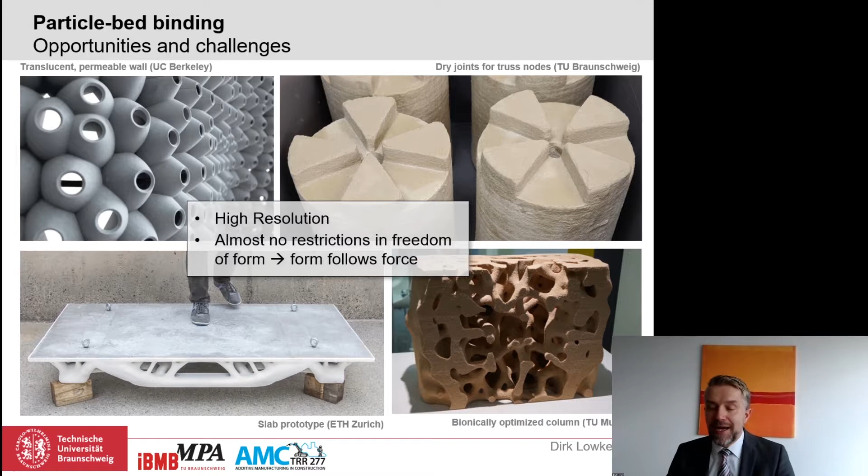However, there is a major drawback with particle bed binding techniques, and this is the limitation in component size, which is limited by the build space. Another disadvantage is the need to recycle the unbound material of the particle bed.

Okay, let's move on now to the mechanical performance. For selective cement activation, the strength values without after-printing treatment do not exceed 17 megapascals. If an after-printing treatment is applied, shown here in the blue columns, strength values can reach up to 34 megapascals. The level of strength is within the expected range, as these concretes have a density of approximately 1.6 grams per cubic centimeter, and can therefore be classified as lightweight concretes.

In contrast, the selective paste intrusion, here on the right side, achieves normal densities of about 2.3 grams per cubic centimeter and correspondingly significantly higher strengths of up to 78 megapascals so far.

Finally, I want to address the isotropy of these materials. In this graph, the strength is shown perpendicular and parallel to the layer structure. As you can see, current experience shows that no directional dependence of the material properties can be observed for the particle bed binding process.

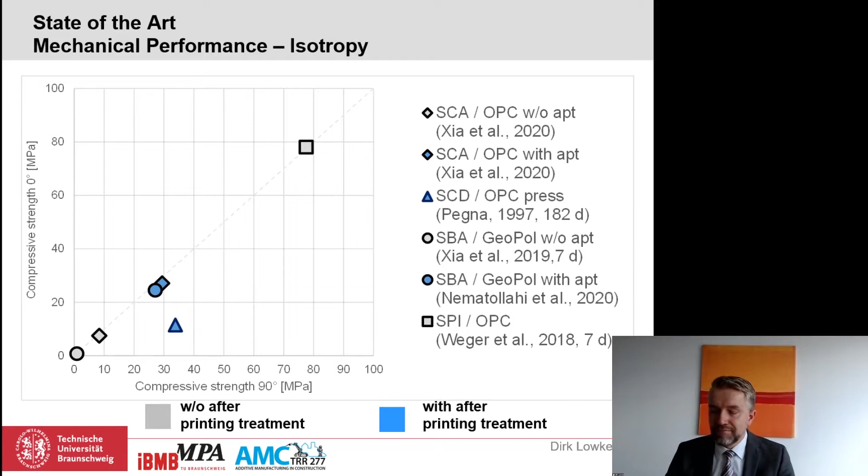Thank you for this nice overview of the state of the art and the potentials of particle 3D printing techniques. In your title, you seem to suggest that this technology, in your view, is capable of working in the construction field as well.

So that would suggest you need to upscale to another level, and there must be a certain level of trust in the material properties achieved with this technology. Could you elaborate on your ideas for scaling up this technology to the field of construction works? Yeah, I will do. Firstly, I would like to follow up on Robert Flatt's statement yesterday. In order to establish additive manufacturing processes as a serious technology in the construction sector, we now must develop a deep and fundamental understanding of these processes.

This means future work in research and industrial development will be characterized by creating the basis for the reliability and repeatability of these processes. I believe simply demonstrating the basic feasibility of a process will no longer be sufficient. To improve the mechanical performance and the repeatability of these properties, we need to understand and optimize every single sub-process of particle bed binding processes. Here we first focus on particle packing.

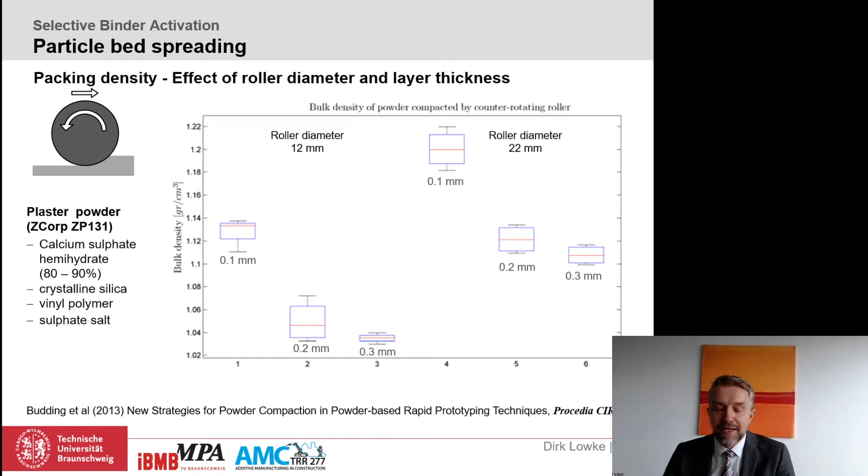As you can see in this diagram, the density increases with decreasing layer thickness and increasing roller diameter. I believe increasing the packing density of the particle bed is key to increasing the density and strength of our components. Therefore, future research should particularly focus on a specific compaction process for the particle bed.

Let me now continue to the process of liquid application. Here you can see the different patterns of liquid discharge from a nozzle depending on the applied pressure. Within the framework of a recently started research project, we are studying this phenomenon specifically for the fluid application setup at the selective cement activation process. This project is part of the recently started collaborative research center TRR 277 on additive manufacturing in construction,

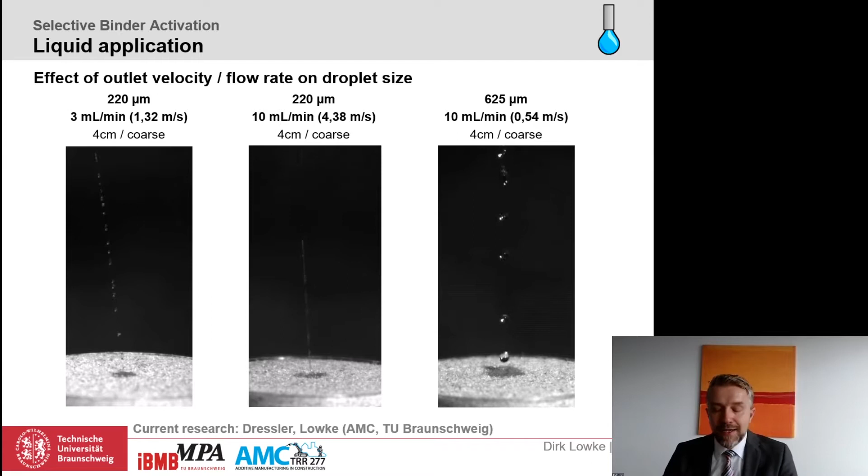But if you now express the flow rate and the nozzle diameter as a flow velocity, we can see there's a functional relationship between flow velocity and droplet size. With increasing flow velocity, we see a decreasing droplet size. Furthermore, we can identify a flow velocity at which there is a transition from a droplet shape to a continuous water jet, in our case here, at 1.5 meters per second.

This knowledge is now the starting point for the next sub-process: the impact and penetration of the water into the particle bed. Let me start with the effect of the outlet velocity and the particle size on the roughness of the particle bed after the water has impacted the surface.

Here we use the digital microscope to characterize the surface texture. For simplicity, we have defined the maximum pit depth as the characteristic value for surface quality. As you can clearly see in this diagram, with increasing outlet velocity, the maximum pit depth increases. However, if you use coarser particles, as shown here in the gray symbols in the particle bed, we can really attenuate this effect.

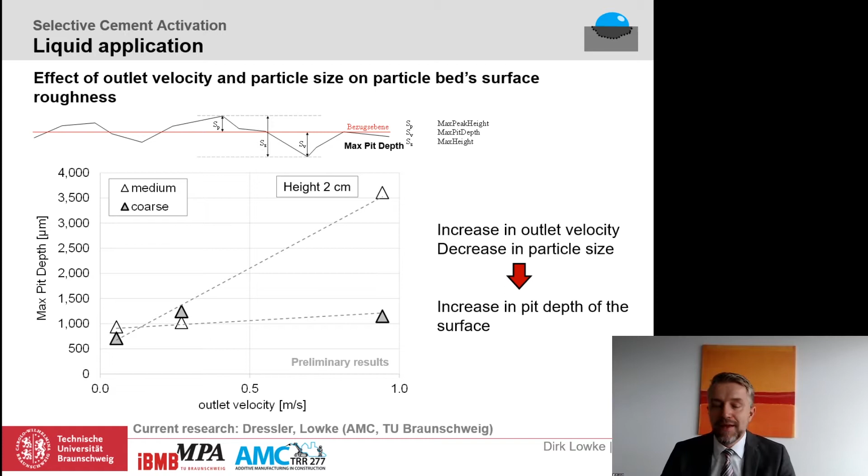Ladies and gentlemen, now we will have a closer look at the water intrusion into the particle bed. Here you can see how a water droplet hits the particle bed and intrudes into it. In real time, this process takes about 0.25 seconds. In these investigations, we are interested in the intrusion velocity and how we can control the intrusion behavior into the particle bed.

In the first step, we focused on the effect of particle size and mixture proportion. We investigated mixtures of cement and three types of aggregates, namely fine, medium, and coarse quartz sand. As you can see here, the intrusion velocity increases with particle size.

In the second step, we varied the ratio of cement to aggregate from 20 volume% cement and 80 volume% aggregate to a ratio of 40/60. You can see that with increasing cement content, the intrusion velocity significantly decreases. This concrete technology variation corresponds to what we actually expected.

However, the variation of cement content and particle size is not always an option, so we are looking for further ways to control the penetration behavior. One really promising way to do that is the coating of particles.

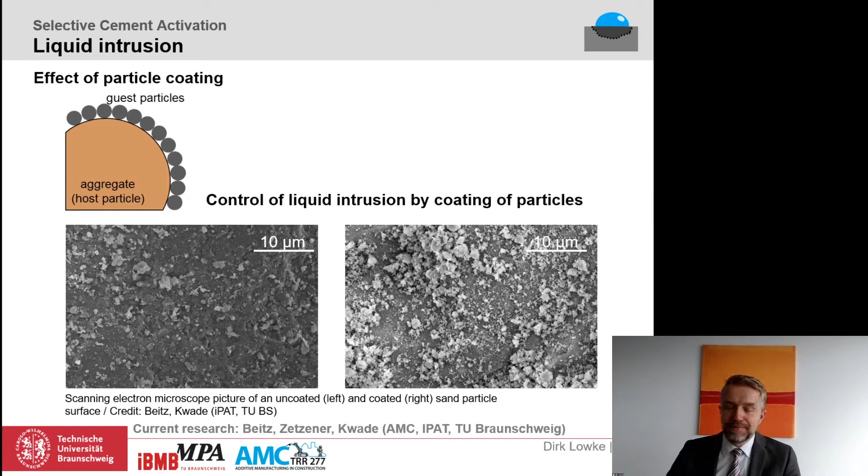Again, on the left side, the uncoated particle, on the right side, the coated particle. You can see firstly that the sand particles are somehow moving on the surface of the water droplet. If we continue the video, we can see that the intrusion velocity significantly decreases when the sand particles are coated with a hydrophobic silica fume.

In terms of numbers, the penetration rate is halved from 34 microliters per second to 17 microliters per second.

The next important characteristic is the intrusion depth, since complete penetration of the layer with the fluid phase is important to achieve a good layer bonding. To quantify this important characteristic, we used microtomography in this case.

In these pictures, you can see the intrusion behavior in dependence on the particle size. On the left side are the finer aggregates, and on the right side the coarser ones. You can see the somewhat unexpected result, at least for us, that the intrusion depth is larger for fine particles than for coarse particles.

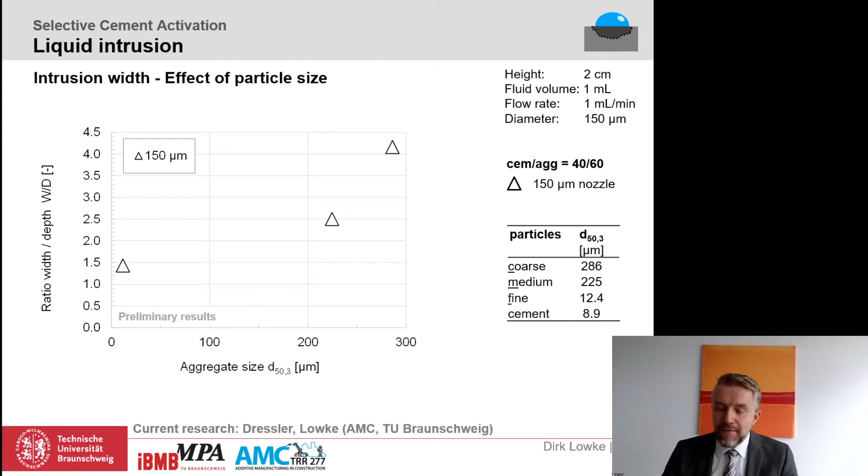I would now like to change the viewing angle slightly away from the observation of the individual mechanism to the macroscopic properties of the components. To do this, I will start with a video showing the inner structure of a specimen manufactured by selective cement activation, captured by micro-CT.

You can clearly see the layered structure caused by the manufacturing process. To quantify these properties, we used the grayscales of the micro-CT images to calculate a homogeneity factor. The lower the difference in grayscale between each layer, the higher the homogeneity of the cross-section. Here, exemplarily, you can see some of our results.

If you're interested, please have a closer look at our paper in the recent special issue of Cement and Concrete Research. What you can see here is the effect of water-cement ratio as well as the effect of water jet pressure at the nozzle on the homogeneity of our specimens. With increasing water-cement ratio or decreasing water jet pressure, the homogeneity of the specimen significantly increases. This graphic should demonstrate that we are able to control the homogeneity by means of concrete technology or process technology parameters.

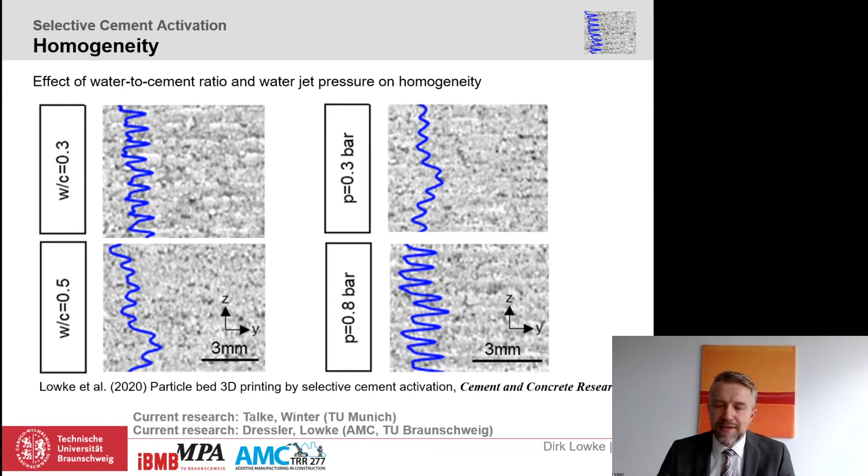Let me now briefly say a few words about the selective paste intrusion method. In this method, the particle bed consists of a granular sand, and the selectively applied fluid is a cement paste. Recently, together with my colleagues Norman Hack and Harald Kloft, we have scaled up this concept to particles with a diameter of more than 30 millimeters. In this case, the fluid phase was a fine-grained shotcrete.

So what is the main challenge in selective paste intrusion or selective shotcrete intrusion? It is similar to the selective cement activation technique, since the fluid phase has to completely penetrate the layer thickness to ensure proper layer bonding. It was recently shown by Daniel Weger and co-authors that compressive strength increases with increasing penetration rate.

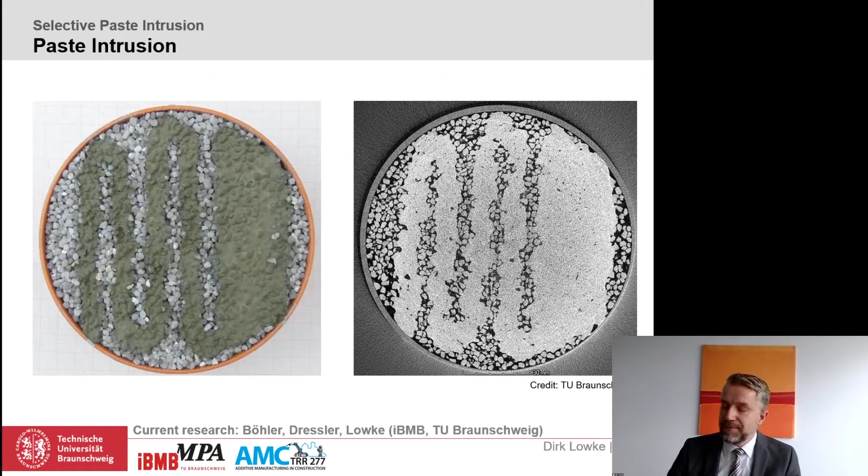To investigate the penetration behavior of the cement paste, you can perform simple penetration experiments and again use the micro-CT to quantify the results. Here you can see some examples. On the left-hand side, you can see how you can determine the penetration depth of the paste or the mortar.

With the aid of computer tomography, we are also able, for instance, to quantify the packing density of our particle bed, as you can see here on the right-hand side. This is also a project which has just started, and the aim here is to numerically simulate the paste intrusion in the particle bed. Hopefully we will see some results in the coming months.

In recent years, this process was intensively investigated by Daniel Weger, and you can see some results of his work here. The aim of his work was to connect the rheological properties of the cement paste with the penetration depth in an analytical model. This diagram shows results, and you can clearly see that, as expected, the penetration depth increases with increasing flowability of the paste.

You can see his final model on the right-hand side. This model is based on the Chevalier model, and it captures the yield stress as the main characteristic for the fluid phase, as well as the porosity as the main characteristic of the particle bed.

Furthermore, his model considers the horizontal flow of the cement paste. By doing so, the model is able to predict the penetration quite accurately, as you can see by comparing here, for instance, the green symbols with the white ones. If you're interested in further insights on this topic, I recommend the PhD thesis of Daniel Weger, which will be available quite soon. Thank you, Professor Lowke.

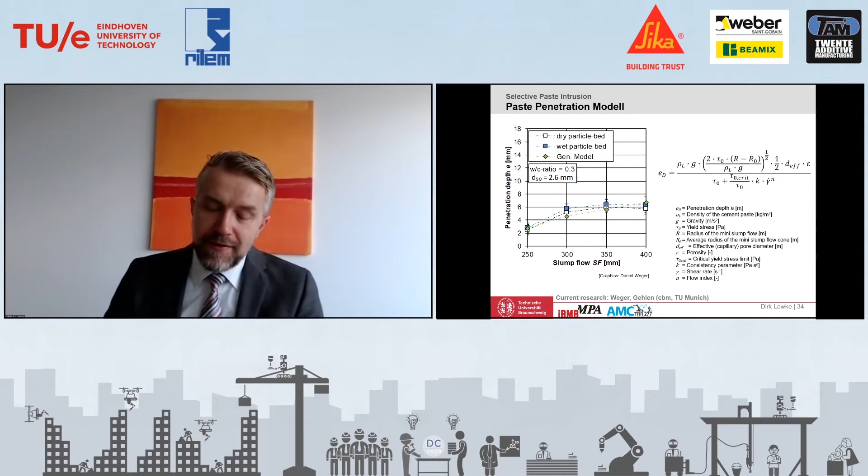After the concrete element is printed, you can introduce reinforcement into these cavities, post-tension, and grout these channels. We are addressing these two strategies in a research project that has recently started within the framework of the Collaborative Research Center TRR 277 AMC, and hopefully we will present our first results soon.

A third very interesting strategy is the simultaneous manufacturing of steel reinforcement by wire and arc additive manufacturing. This strategy is pursued for the selective paste intrusion method at the Technical University of Munich, also within the framework of the Collaborative Research Center TRR 277. In this process, the reinforcement is built up section by section before the printing of a concrete layer.

The main problem, however, is the heat generated during the welding process. The temperature at the welding point exceeds 1,500 degrees Celsius. However, as you can see in the picture on the right, preliminary tests show that by moving the weld point out of the particle plane by only 25 millimeters, the temperature load in the particle bed can be reduced to around 100 degrees Celsius without any active or passive cooling strategies. If you're interested in this technique, I refer you to the presentation of Daniel Weger on Thursday in room D.

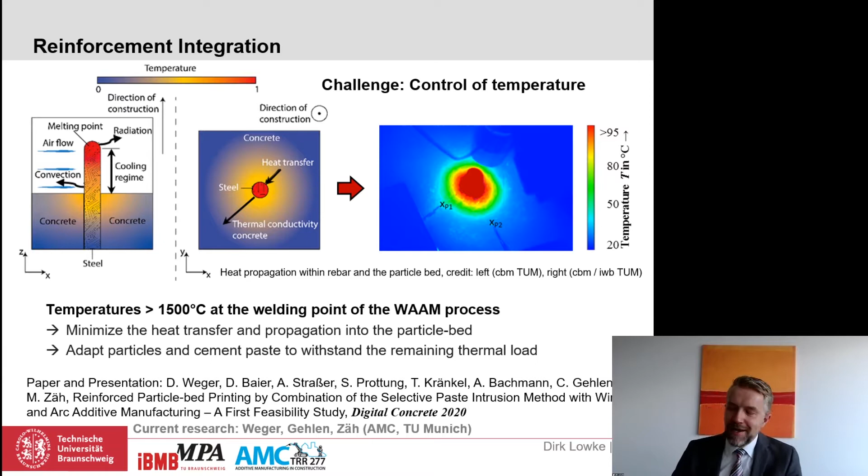Let me now conclude my talk. I believe particle bed 3D printing techniques are applicable in concrete construction. The main advantages of these techniques are their high resolution and the fact that they have almost no restriction in free form and freedom of form.

For the selective paste intrusion technique, we already have very good material performance. In the case of selective cement activation, the density is about 1.6 grams per cubic centimeter, and therefore the strength is similar to lightweight concrete.

To further improve the reliability of these techniques and the repeatability of the material properties, basic research on the interactions between material and process is needed, which I addressed in my talk. I think the most important are the particle bed spreading and compaction process, the liquid application process, the liquid intrusion process, and the modeling of these processes.

And last but not least, we need strategies for reinforcement integration into the particle bed.

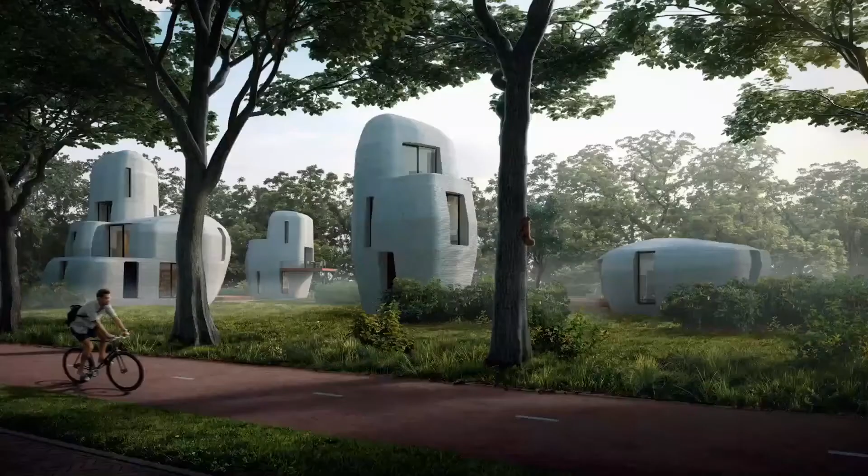We started cooperation with 5 parties: the Technical University of Eindhoven, Eindhoven Municipality, Witteveen en Bos for engineering of the house, Weber Beamix who will print the house, and Van Wijnen, the building manager who will build the house. We had different meetings about the building, the structure and the design of the house. It's very special that we now have the permit to build the first 3D concrete printed house.

The design of the houses is made by Houben & Van Mierlo Architecten. There are big stones, menhirs from Asterix and Obelix, and they have landed in this field.

We are using a parametric model, and we made the design of the house in it, and also the structure of the house. So we can send it to the robot and print with it.

For this project, we don't use a steel wire in the concrete element. We have a special design of our house, and we made a structure so that we don't need a steel wire. Let me explain the structure of our house.

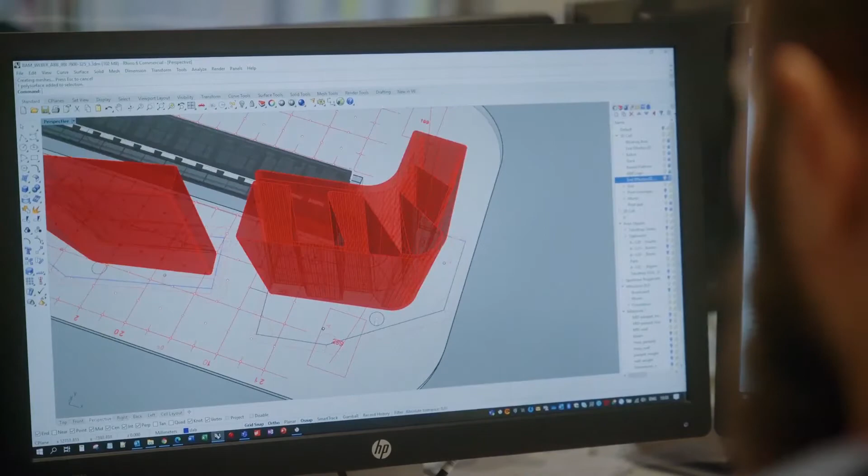We're first making the piles in the ground, that's the first part of the foundation. After that, we make the slabs in the concrete print factory of Weber Beamix. That slab is for transportation of the wall elements and also the second part of the foundation.

On that slab, we're going to print the wall elements. After that, we transport them to the building location and put them on the piles.

On the wall elements, we put a wooden rooftop, and on the wooden rooftop, we put the parapets, which are also from printed concrete. For the first house, we use a rooftop from wooden beams - it's actually a traditional way of building.

For the next houses, we want to use a prefabricated wooden floor, or maybe we print the floors and put some reinforcement in it. Weber Beamix is going to print 5 houses.

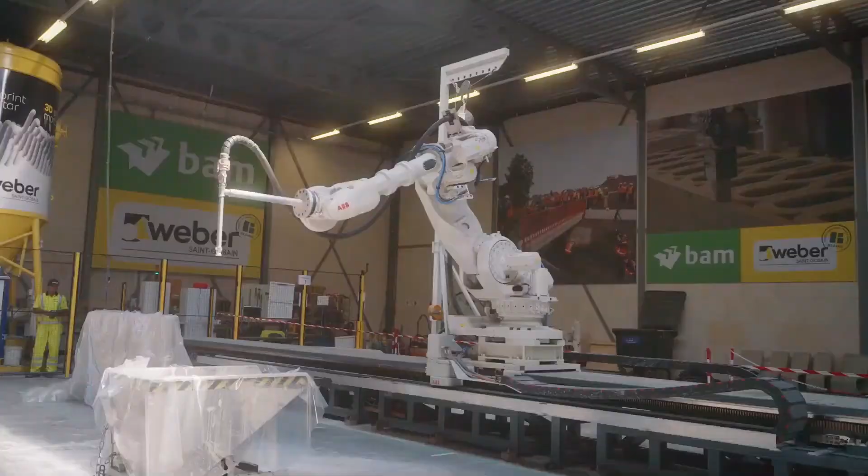Welcome to our print factory that we own together with BAM and Weber Beamix. Here we will print the houses for the project Milestone.

Before we started printing, we had to solve quite a few challenges. One being the cantilever of the outside wall, the second the long printing time, up to 16 hours for producing the element, and the third being the permitting. This place has to be safe because people will live in it, and of course the last one, logistics, had to be solved as well.

The answer to solving the challenges is having a robust system - robust with regard to the printing system, so the mixing, the pumping, the robot, but also a robust system regarding the mortar. With regard to the mortar, we decided in our product development to stay with ordinary Portland cement as the binder. The drawback of an OPC system is that you have to find a way of stacking layer on layer without the bottom layer giving way when you put the next layer on top.

This problem has been solved by modifying the rheology so that we get thixotropic characteristics in our mortar. Another benefit of having an OPC mortar is that the rules that apply to concrete can be extrapolated to this mortar, because a lot is already known about ordinary concrete.

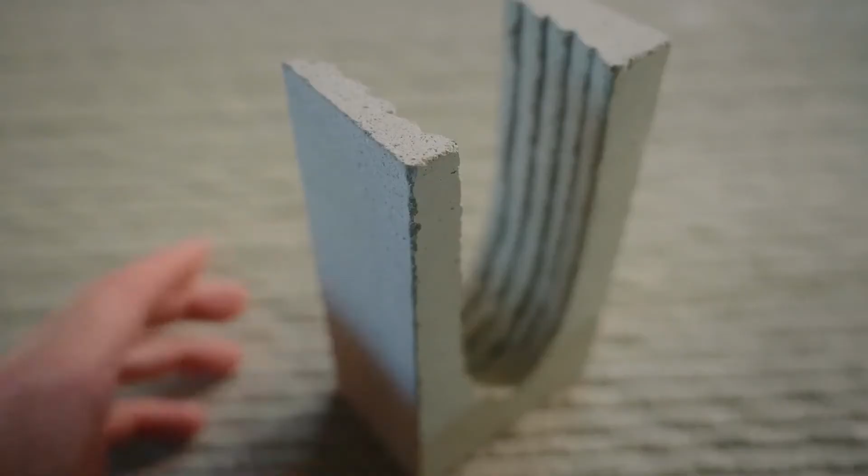Another thing is, when you have a mortar that doesn't harden immediately but has an open time of about 90 minutes, it's much easier to get a monolithic structure. That means that the quality of the interface layer between the layers has the same performance as the bulk of the material.

That is extremely important when you have load-bearing structures and when you need the permitting that we need for this house. And it's even worse when you have layers adjacent to each other, not on top but next to each other. There we have to guarantee as well that the quality of the interface between layers is of the same nature as the bulk of the material. With this product and this system, we can guarantee that this is obtained.

We have a robust mortar, but we also need a robust system. For the system, we have a silo mischpump from m-tec and SMP. We did modify the system a little bit.

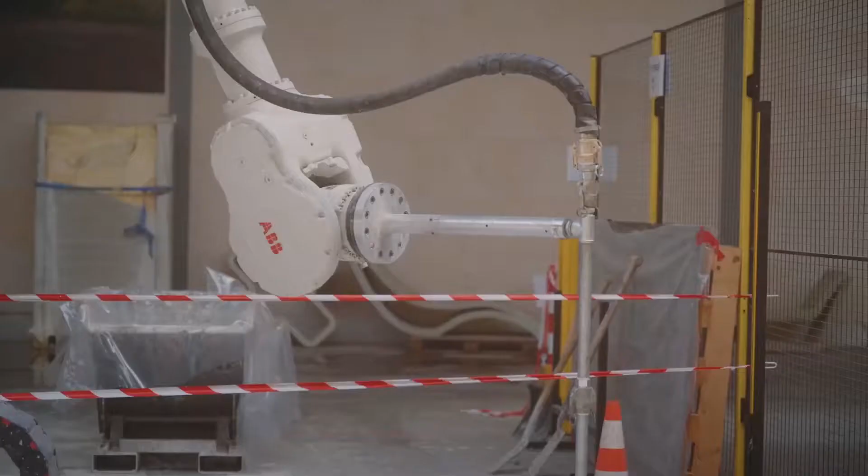We changed the water dosing in order to have a more constant quality of the mortar being mixed and pumped. And we swapped the rotor stator in order to have a smaller amount being pumped, as required by the robot. We have an ABB robot on a track, and we have the possibility to print with a round nozzle and with a rectangular nozzle.

The drawback of the rectangular nozzle is when you have a print path that has curves, you have to make sure your nozzle follows the curve, and therefore you need another axis of your robot, reducing the reach of your robot.

We also have an inline quality measurement system to guarantee and control the quality of the end product. This sensor measures the yield of the pump, the viscosity of the mortar, the density of the mortar, and the pressure being applied by the pump.

From the yield of the sensor, we have feedback to the frequency controller of the pump, guaranteeing that we always pump the same amount of mortar. This makes sure that when we put adjacent layers next to each other, they have the width we want, giving a monolithic character to the interface of the material between the layers.

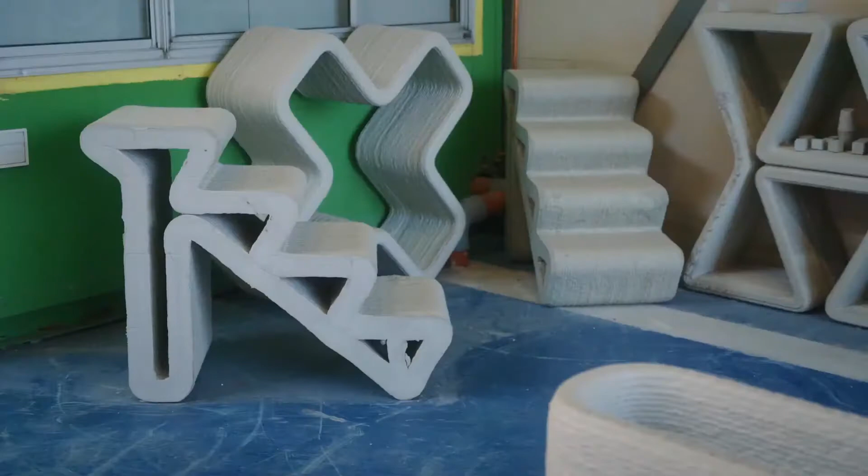From the viscosity measurements, we have feedback to the water dosing, helping us guarantee a constant aesthetic appearance of the printed element. The pressure sensor is an extra quality control measure—if there's a problem with the pressure, the system shuts down so the whole system doesn't explode, so to say.

One of the other issues we had to solve was the logistics. For this purpose we print on a slab with anchors that we can hoist, so we don't hoist from the printed material itself, but from the concrete slab that's been cast, onto a truck and from the truck to the building site.

With all these measures, we've changed from a proof of concept to a technology readiness level of about 7 to 8. But there is still room for improvement. For more details, please see the paper in the conference proceedings, and I would love to see you in 2021 when the house is finished on site.

When this house is ready, we're going to take the learnings from it to develop the next houses—smarter detailing, better printer technology, and smarter processes to build and develop the house. The aim for the last house is to print it really on location.

For digital concrete printing, we foresee development to use reinforcement in the concrete, but also using less material and having a sustainable mortar for the future.

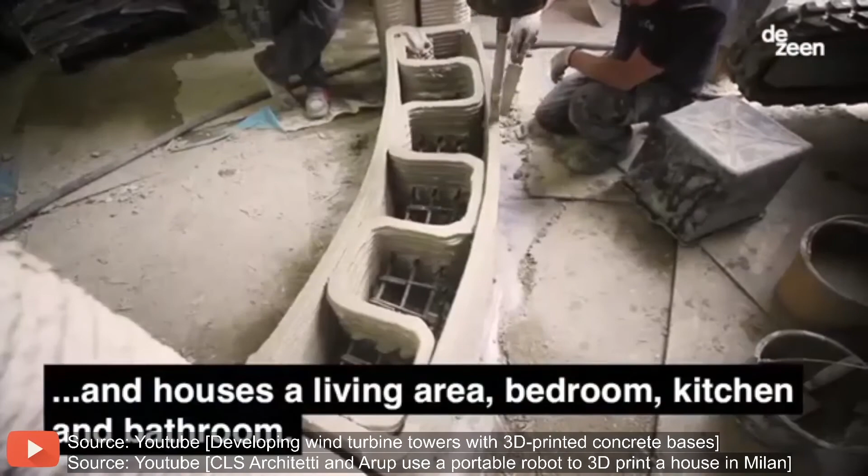We often get questions regarding the choice of printing on-site, on location, or in the controlled environment of a factory. Likewise, just like we've seen now, we see variations of gantry systems and industrial robot arms. Maarten, can you reflect on these choices based on your expertise? Well, I think the most beautiful parallel is with industrial automation. For instance, the automotive industry utilizes typical industrial robots like the last one we have seen for outdoors usage.

And the reason is that it is not very difficult to reprogram it to do a different task. Gantries are also used, of course. They are relatively lightweight, so I think the productivity can be higher with such an arm, because you can really design the gantry like a lightweight structure. But it might take a lot of time to set it up. So that's why I think for on-site, you might expect that you will get more the industrial type of arm system, the stacked systems. The whole ball game, of course, is accuracy versus speed and productivity.

And I think that is where 3D printing maybe seems to promise a lot, but in practice it is quite difficult to find the right business case, because it is taking a lot of time to put each layer there. And if you want to do that with a certain accuracy with a heavy robot arm, and it will be heavy because your printing head is a heavy one in building and construction, because there is concrete and it's heavy. So how to get the right accuracy in combination with high productivity? And high productivity means speed. And if you go to higher speeds, the accuracy locally goes down.

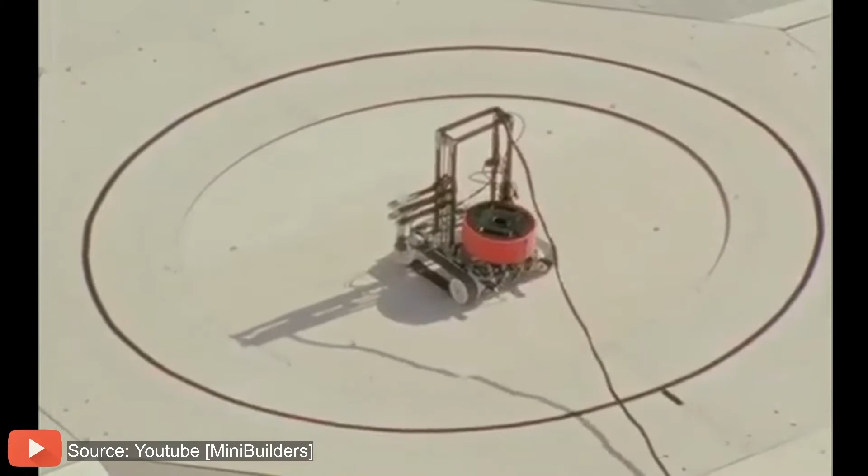The robot has two tracks, and the CNC - the nozzle is fixed on the CNC. The nozzle can go up to 15 centimeters, and this is how we create the first 15 centimeters of the structure. In the front of the robot, we have an infrared sensor that recognizes the path on the floor, on the ground, and it follows the track. It follows this line, and this is how it prints the first layers.

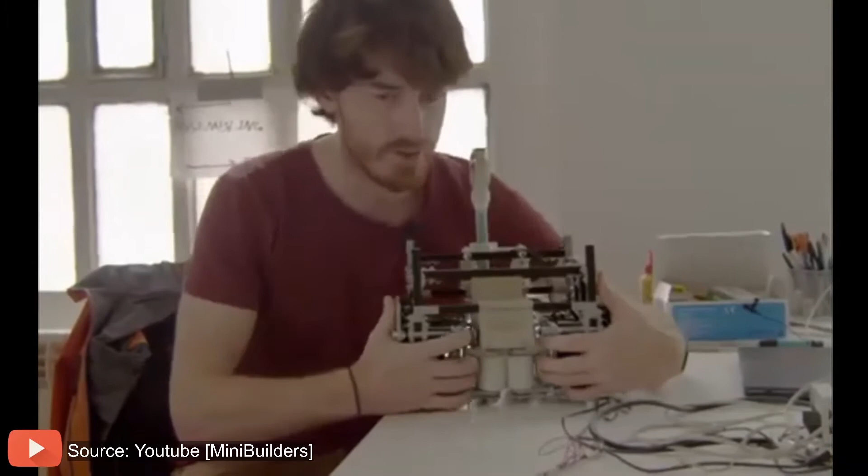So this is the second robot, which clamps onto the layers previously printed by the first robot. With this mechanism, it clamps onto those first layers, and then these servos rotate the rollers, which push the robot around that already printed structure. As it's going around, the really special thing about this robot is that it's printing on the layers it's already printed, constantly going over the layers in this spiral.

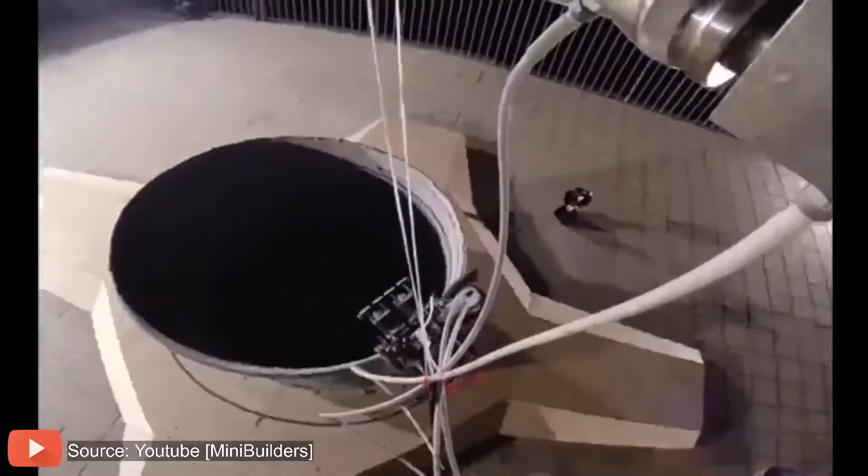Unfortunately, we didn't have time to show the third robot in this system, but it's actually a vacuum robot that is put perpendicular to the other layers. But well, this seems like a first step towards 3D printing robots that can play soccer in their lunch break.

Is it a development that has a lot of potential for 3D printing on a large scale? Maybe, yes. I see a parallel with the agricultural industry. The trend has been for decades to make agricultural machines larger, because people thought productivity requires a huge machine on the fields to harvest potatoes or whatever.

What you see now is what people call pixel farming. We are doing research on that with my group, and what we foresee is that in a large field, you don't have one crop or one vegetable, you have various things, and multiple small robots, maybe 10, go all over the field. Each of them is small, but they can harvest very locally, bring it back, and come back. So instead of thinking in very expensive large machines, we think about multiple very small machines.

What I like about this video is that you can see the small robot is basically getting its local position information from the fact that it is connected to the piece which is being built. So you have a very local connection to the location where you want to be. No expensive measurement system for absolute accuracy, but the local reference is there.

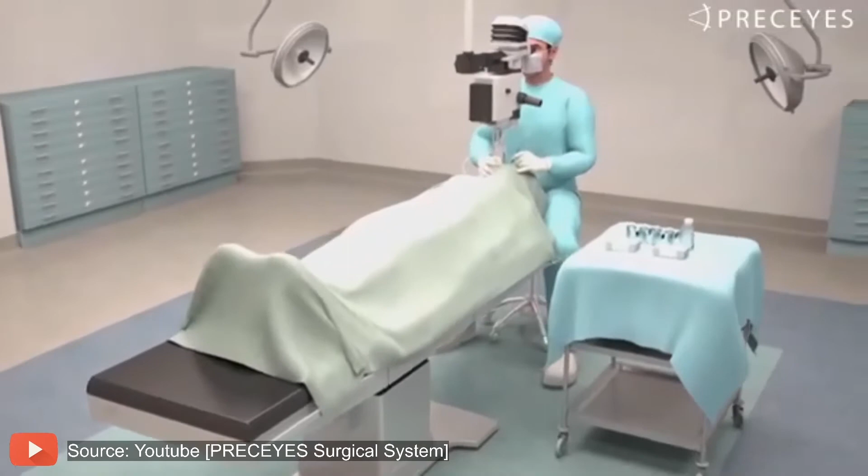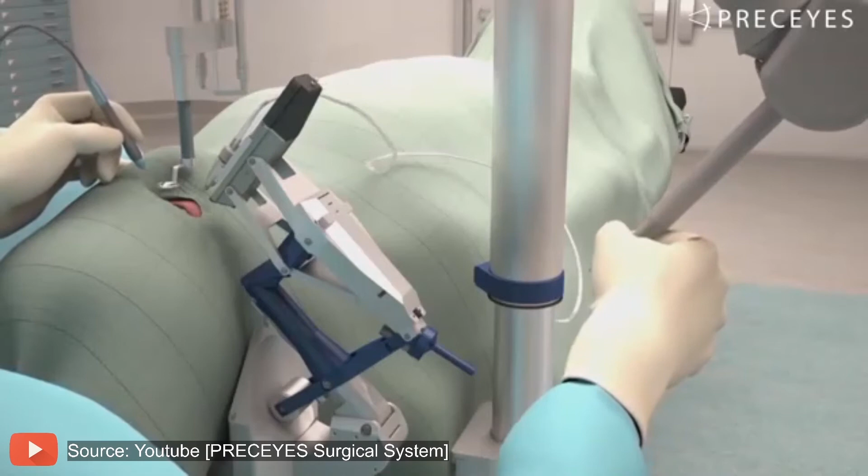Preceyes Medical Robotics has developed an innovative system to assist surgeons performing vitreoretinal eye surgery. Eye surgery requires incredible precision at the limit of what is possible by hand. Highly experienced surgeons manipulate tiny instruments inside the eye, but with anatomical structures of only a few micrometers, higher precision would be beneficial. Preceyes employs state-of-the-art robotic technology to obtain this higher precision. The system is designed to integrate smoothly at the operating table and can easily be included or excluded during surgery. To preserve patient contact at all times, the surgeon continues conventional operation with one hand while operating the system with his other hand. Extremely high precision is achieved by downscaling movements and by filtering out the surgeon's hand tremors. Control of the system is intuitive, facilitating easy positioning of surgical instruments.

So what are we looking at here? Is this a development towards completely autonomous surgery? Now, this is not an autonomous robot. This is a master-slave robot. Basically, it's minimal invasive surgery, in this case for an eye application.

You could recognize similar elements like the robots you're using in 3D printing. Namely, you have an end effector which is inside your eye, and there's a robot arm having that needle which is sticking inside your eye. However, in this case, we have a human with a master device which is steering that robot slave. The feature of this system is that you can scale down the motion. So if an eye surgeon is moving, say, 1 centimeter, we can scale down by our choice via the computer, scale down with factor 10, then the motion inside is 1 millimeter or even go down further.

The unique feature of this Preceyes machine, which we developed in our group—one of my PhD students graduated on this—is that the accuracy we achieve at the inside of the eye with our needle is about 5 microns, so 0.005 millimeters, which is about 20 times better than the top eye surgeon in the world. And that's amazing because by this machine they can now place stem cells, for instance, behind the retina to cure people with eye diseases. This is typically where the technology is being used to make the next step for doctors in curing people, which they are not able to do now because they vibrate too much and don't have the accuracy.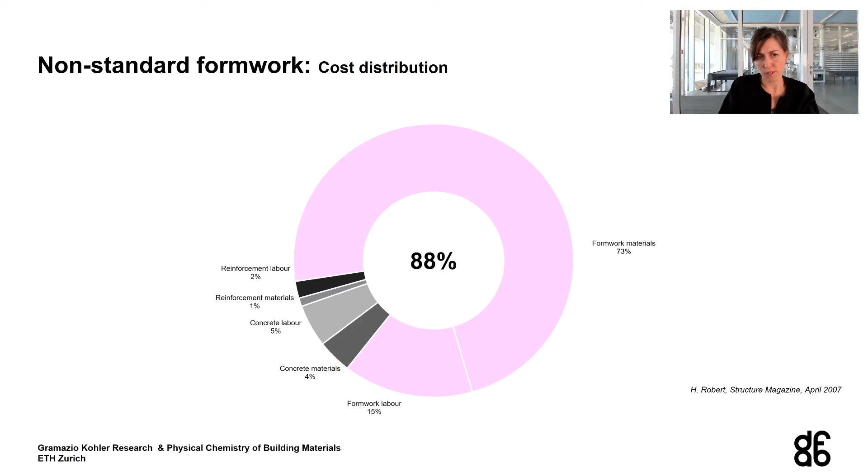Which reasons why non-standard formworks increase the overall cost of a structure up to 88% of the overall cost of the formwork itself. Now, also knowing the other downside of these non-standard formworks is that they end up as landfill and waste and comprise to the already 36% of construction waste, which is already standing in Europe in 2016.

So we ask ourselves how we can reduce. And this has already been asked as a question for more than a decade. Can we reduce material? And can we reduce the formwork? And when we look at the work of contour crafting invented by Professor Khoshnevis as early as 2004, we started looking into alternative ways to shape concrete, known as contour crafting or 3D concrete printing.

This has excelled into many other new companies and research endeavors all around the world. Others look into stay-in-place formworks, such as mesh mold at Gramazio Kohler Research, Aerocrete, or Knit Candela by the Philippe Block Research Group.

While a third avenue goes along the line of looking into 3D printed formworks that are very thin. However, to use such ultra-thin formworks requires an additional support structure around the shell, which is done using sand or additional printed structures around to sustain the lateral pressure of the concrete inside. So these are all very valid ways of looking at how we can reduce material and formwork.

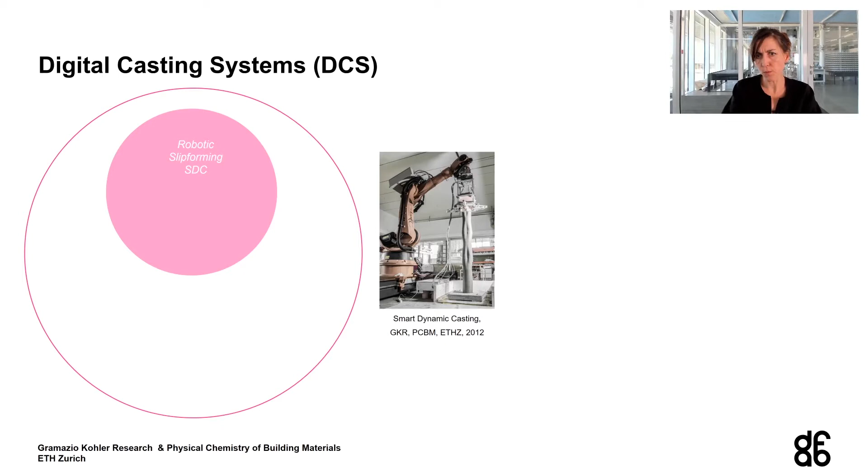So it started in 2012 with robotic slip forming, which was part of my own PhD in a collaboration with Gramazio Kohler Research and the Institute for Building Materials with Robert Flatt. We established a new technology which went into using it for ultra-thin formworks known as eggshell, then for SDC folded structures, and later it converted into AC/DC intense, which I will all be presenting here today.

They all have the same thing in common, which is using set-on-demand concrete. And what does set-on-demand concrete mean? Well, in fact, what we do is we have a retarded mix, which is pumpable, and then it's placed into a reactor into which accelerating admixtures are dosed in specific intervals.

So for smart dynamic casting, we cast a self-compacting concrete into a mold that moves, while for thin forms, such as eggshell and intense, we fill into a still-standing formwork, which is not moving, but for eggshell being printed simultaneously and for intense being supported very weakly. It's very similar to what we do in 3D concrete extrusion, apart from the fact that we are using a self-compacting material that is placed into a minimal mold, whereas they print in a layer-by-layer manner.

So if we look at 3D concrete printing, we need a material that is pumpable. Then it needs to immediately obtain strength to sustain its own weight and then sustain the next layers on top. For digital casting systems, we also need a pumpable material, but with the difference of having a material that is self-compacting when placed into the mold, and then building up strength to sustain the weight of the layers placed on top.

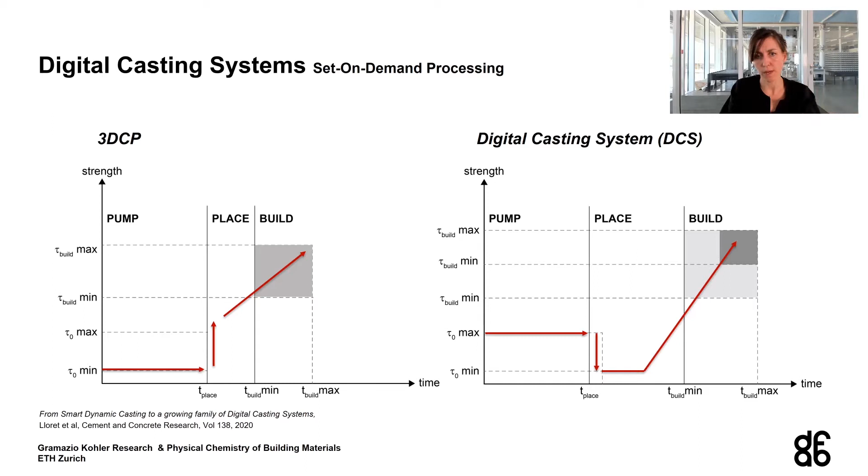So essentially what we do is assure that the material is not too soft nor too hard. If it were too soft, it would flow out, and when it's too hard, we have too high friction, making the structures break. In between this short window of time is smart dynamic casting, or digital casting systems.

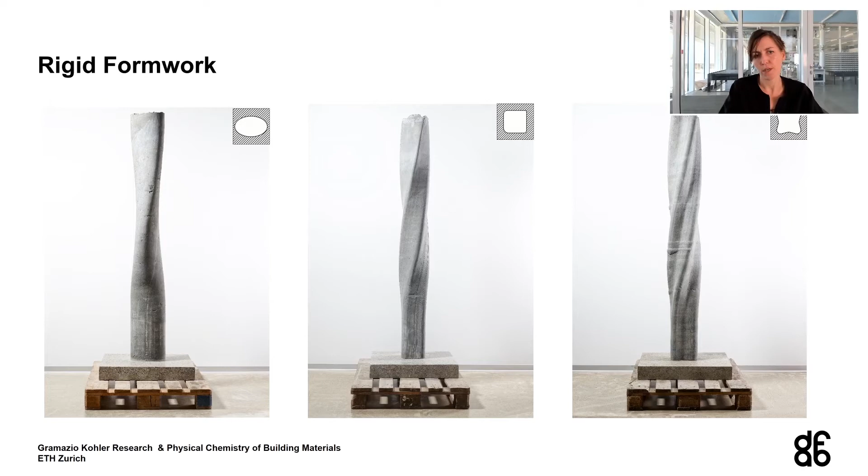Initially, we tested different rigid formworks to see if it was actually possible to shape this material in this early hydration phase. It was successful, and we were awarded amongst the 5th best innovations at ETH Zurich with what we call the Spark Award, and later that same year we received the Innovation Award at the conference in Norway.

But it was not our goal to shape concrete in a rotated shape. We wanted to see if we could produce material optimized columns, or in other words, place material where it's really needed.

So we started with what we call the local shaping formwork, where we had a 40 centimeter tall formwork in which we placed actuators inside.

After some tests, we decided to place the actuators at the very bottom of the formwork to indent the column as we went upwards. To make this a success, we had to make the column hollow, due to the fact that we are using a self-compacting concrete that is actually incompressible.

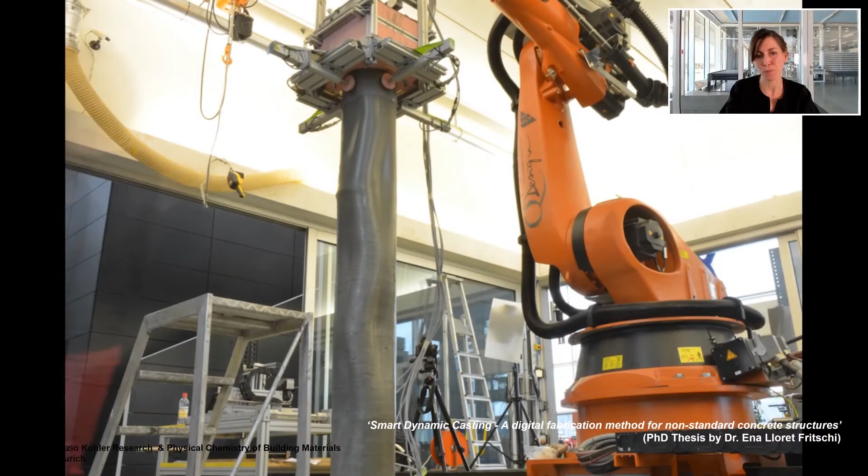However, despite being able to produce a couple of these tall columns, there was a very limited design space and a lot of issues in terms of friction and slip-stick effect inside of the formwork.

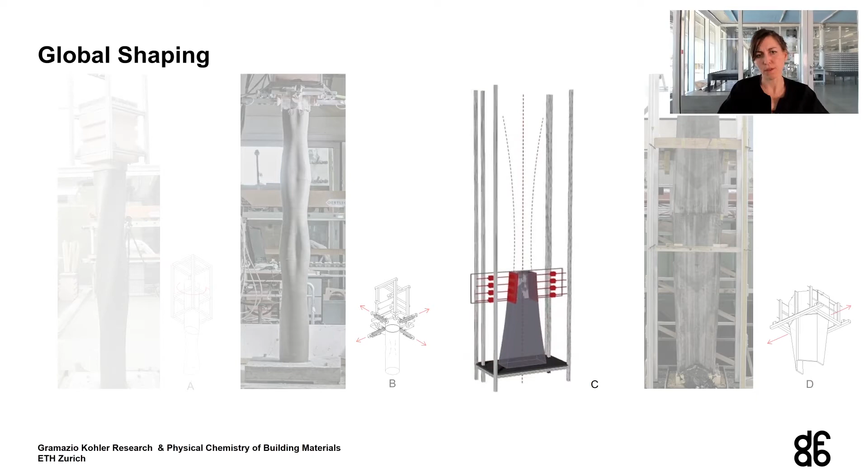So despite having a beautiful image with a beautiful column, we wanted to go a step further. Instead of only shaping at the very bottom of the formwork, we aimed to test shaping all around the formwork itself across the 40 centimeters, to disturb the material as little as possible inside of the formwork.

This was very quickly successful, and we were able to produce a column which changed from 40 to 10 centimeters and back to 40 in a very short period of time, within a bachelor thesis project at ETH Zurich.

However, changing the cross-sectional area made it difficult to follow up with the manual acceleration and mixing. Therefore, together with Lex Reiter and a group of students, we developed the concept of a process automation.

We used a funnel in which the retarded concrete was pumped in from the bottom and accelerating admixtures were placed inside, and the material was flowing over as a self-compacting concrete into the mold. All of this at a speed that assures the batches could sustain their own weight throughout the production.

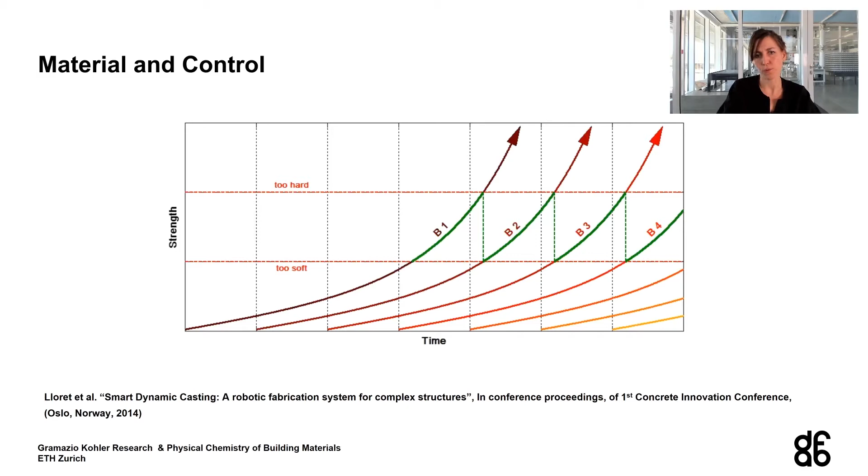This success of having a structurally optimized column was the reason why we were invited to take part in the DFAB house at the EMPA in Dübendorf, Switzerland, where 6 different innovation objects were placed together into one unit to show how digital fabrication can change the way we build and become more sustainable for our future. It started with the mesh mold and the in situ fabricator, which most of you are familiar with.

Then we have the smart slab, and on top of that, the spatial timber assembly structure that was prefabricated at ETH Zurich, and it was closed off with a translucent aerogel facade.

And finally, the smart dynamic casting mullions, of which we produced 15 individual ones that were reinforced. The fabrication setup that we used was a linear axis, so no longer the 6-axis robot.

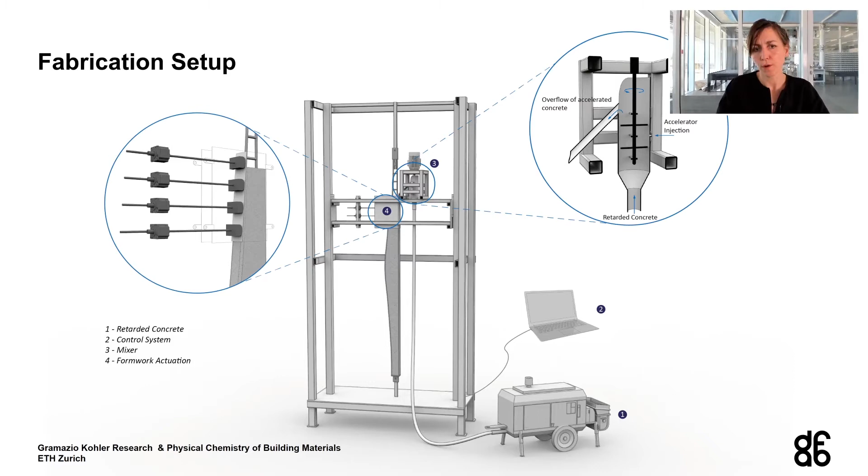For this, we again installed a pump that pumped into our reacting system, and our actuated formwork, which all together was synchronized in a custom-made software.

The reinforcement was probably one of the biggest challenges and novelties of the mullions, since we had never really implemented that in the SDC process. We also had to reduce the cross-section down to a minimum of 7 by 12 centimeters, which of course posed a number of challenges in terms of friction.

The connection points of the rebars were used to install them at the fabrication system, but also later on inside of the architectural premises in Dübendorf.

So the structural design of the mullions was adjusted to the load requirements of the tributary length of the windows, and these varied across the facade, so the belly size of the mullion also had to vary. The red line shown indicates the minimum width of the middle section required by the structural design to take the max deflection, which was supposed to be 7 millimeters.

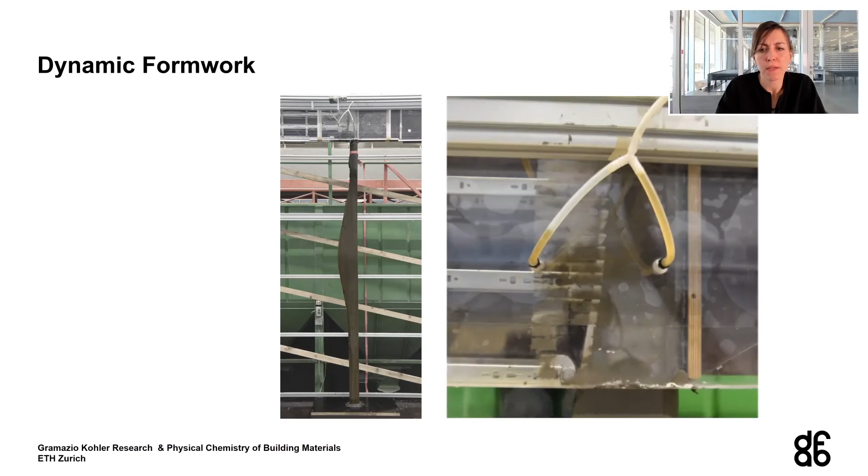Before we started the real design, we did some first testing to evaluate the shaping constraints and the mechanisms of the formwork, as well as to detect faulty productions that could occur during this process.

It took quite a number of tests to have a system that enabled us to produce 15 mullions in 3.5 weeks.

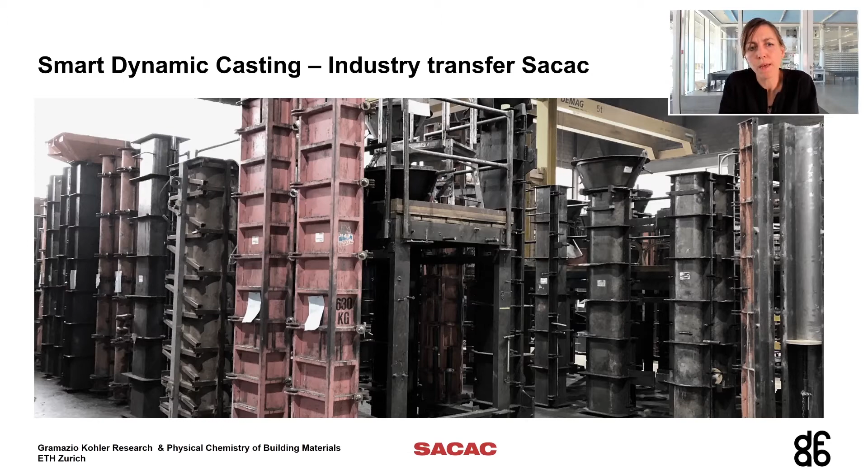However, if we take it a step further, we also asked ourselves if we could expand the geometrical possibilities using digital casting systems. And that is how Eggshell emerged.

So we saw during the production of the mullions that making a formwork that is actuated, enabling us to shape the material as we are slipping, is relatively complex, and it has its own constraints. We would, for instance, never be able to produce a column as you see here on this image with such a formwork.

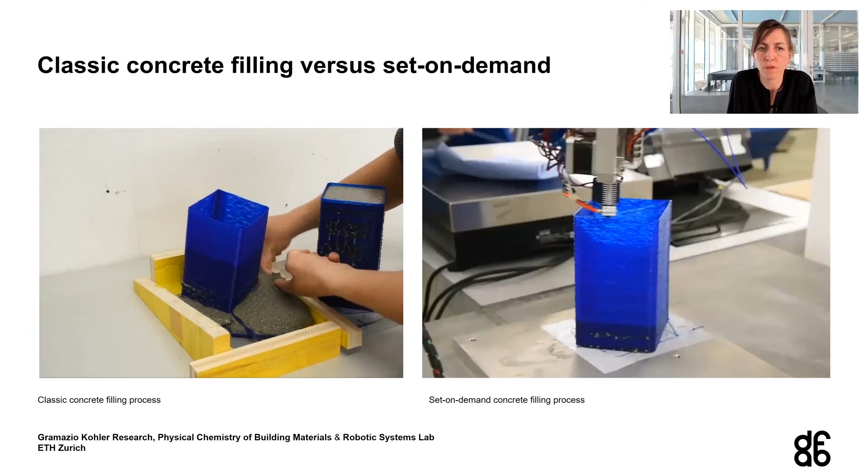So we asked ourselves, could set on demand with eggshell or ultra-thin formworks be a novel way of thinking of the formwork? In a normal classic concrete filling process of a thin formwork, the material would exert pressure and cause the formwork to explode, as you see on the image. But if you use set on demand, the material is not exerting any lateral pressure on the formwork, giving us a new way of thinking of a formwork which is as thin as an eggshell, and thereby the name.

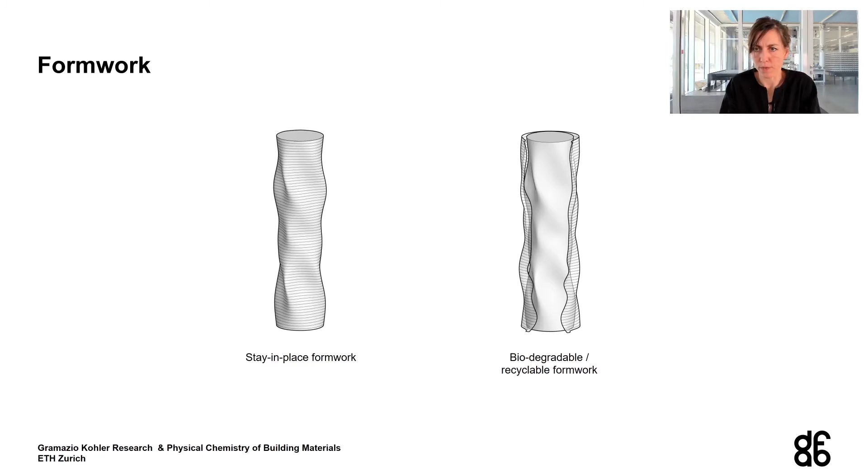So the fabrication concept that we developed was to use an extruder with a filament, which is printing as we fill accelerated concrete inside, all with reinforcement. We would use a stay-in-place formwork, which could be made of concrete or another material, or a biodegradable recyclable formwork out of a polymer, as done in the PhD thesis of Joris Burger, who will also be presenting in one of the sessions.

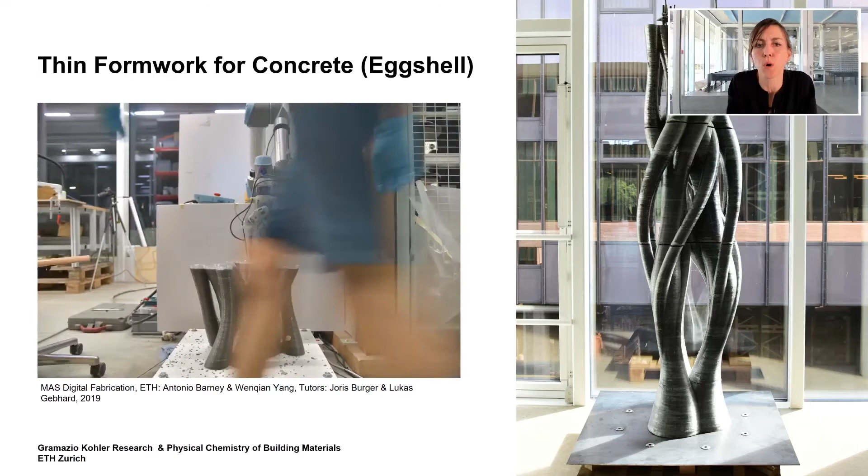So Joris had a student project in which he asked the question, how far can we go with the geometry? What is the most extreme we can do, while still including reinforcement? The student came up with the idea of a snake-like column where they printed the formwork while filling it, but also assured they made void spaces for post-tensioning cables, enabling them to compile 3 segments into one with post-tension, showing that the geometry can be expanded significantly with this system.

In a parallel study that we did for Basler Hofmann, one of the leading engineering companies in Switzerland, we were asked to produce a column with eggshell to support the non-standard structural roof on the outside of their premises in Esslingen in Switzerland.

So this project had to include conventional reinforcement, it had to be exposed to the outside, and it had to take the loads from the roof on top.

However, as we were very early in the process with eggshell, and our printing facilities were way too slow, the formwork you see here took us 36 hours to print, and we could have filled it in less than 6 hours with set on demand. The things were not yet aligned.

So we decided to use the set on demand in a separate process. We started by printing, then we placed the reinforcement inside, and finally we would fill it with set on demand using our manual acceleration system, which we had developed in the past in smart dynamic casting.

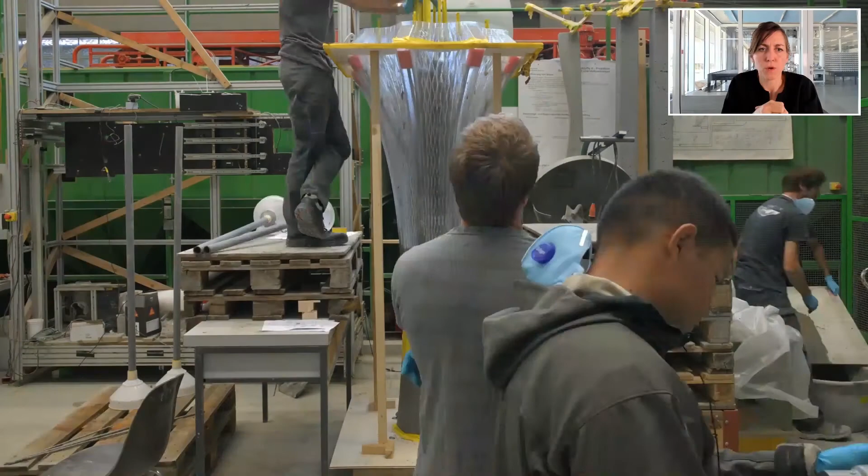So you see here the team filling up the formwork, which is only supported to assure that it's not moving around as they are filling inside. So the wooden structure that you see is not supporting any structural loads of the formwork.

After the formwork was filled, the formwork is being removed. And of course we have an imprint of the 3D printed structure, but we have no cold joints and we have a beautiful surface. The final result was then installed on site in Esslingen to provide the first built example using eggshell in a fabrication approach.

And in fact, you can read more about some of the constraints that we detected during this fabrication process in the 3D Printing and Additive Manufacturing Journal, where we recently published.

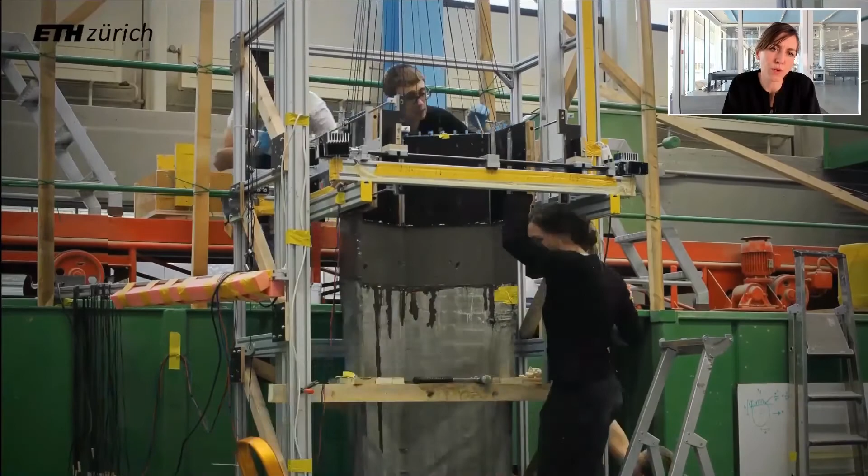But we also asked ourselves, can we produce thin folded elements and thereby rethink what the systems can do? We asked this question first in a bachelor thesis project where the students were asked to produce a canoe that was as thin as possible using the smart dynamic casting technique. The students were able to produce a canoe which was 18 millimeters thick with carbon reinforcement, and the height was finally 3.5 meters.

With this concept, we took it a step further and asked, can we replace the heavy-duty formworks needed to produce structural folded elements for architecture? Anna Szabo took this on as a PhD thesis and tested different formworks to see what the design space for such structures could be. After numerous experiments and material adjustments, it was possible to produce a set of thin folded elements. However, it was necessary to manually distribute the material, and the design space was rather limited, both in the possible shaping and in the height. This was mainly due to the fast hydration of the material, which Anna Szabo can tell you much more about.

In fact, the first prototypes turned out rather as failures, where significant ripples were shown, as here in the picture. This was caused by the increased friction of the formwork, which had an enlarged surface compared to the mullions, for instance, and also a very short processing time of the material that could be shaped due to the fast hydration. So Anna Szabo asked herself, how can I avoid friction? And that is how she came up with the idea of In Tense formworks.

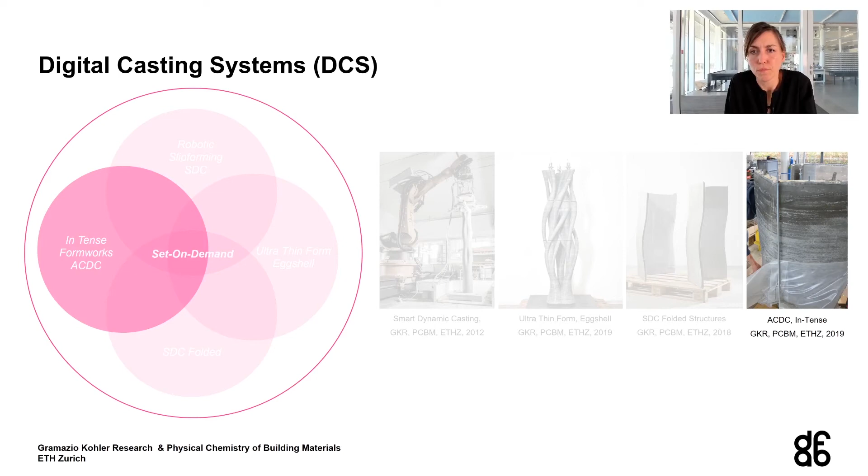Anna went from thin folded concrete structures to In Tense formworks, which she also calls ACDC, additive controlled digital casting. So instead of moving a slip form vertically, the goal was now to use thin materials that were weakly supported and then filled with set-on-demand materials that used a commercial acceleration system in combination with superplasticizers. Here you see one of the very first successful prototypes, which were actually done very fast. She filled up this more than 1 meter tall formwork in less than 25 minutes.

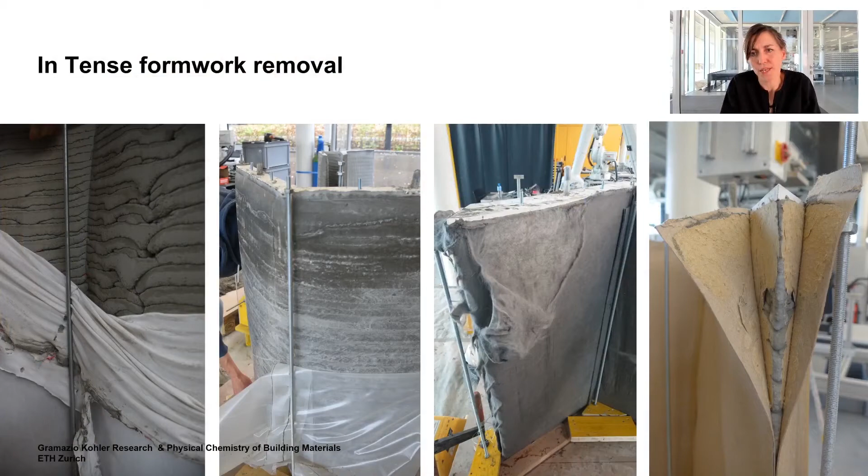She tested 4 different materials. On one hand, she tested the plastic foil, as you see in the video. Then she tried geotextile and a textile on its own, as well as ram board, as you see in this image. 3 of these were selected and assembled into one single structure. As you see here, she was also able to have void zones for the post-tensioning cables, proving that very cheap, ultra-thin formwork can be used for the production of concrete structures.

So to sum up on this talk, I would like to emphasize the fact that robotic slipforming, eggshell, and In Tense as stay-in-place tension formwork all share the same processing concept of set on demand. Together, they have established a new field of concrete construction and proven that we can use reinforcement systems such as post-tension, conventional reinforcement, and fibers, as well as carbon strands. This is a new field which we call digital casting, which hopefully will allow us to sooner than later have an impact on both standard as well as bespoke production in concrete structures.

And with this, I would like to say thank you for your attention.

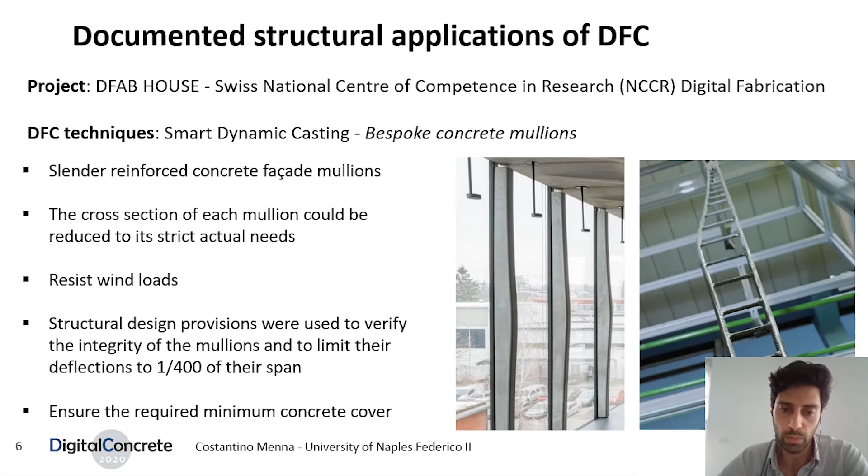The second structural element of the DFAB house is the double curved wall obtained by means of the mesh mold technique. It is a load-bearing wall 12 meters long and 120 millimeters thick with double curvature, supporting the loads of the structural elements above. Due to these characteristics, the structural design was carried out against the value of the vertical load in terms of cross-section and amount of reinforcement, with a reinforcement system consisting of vertical continuous bar and horizontal welded segments robotically placed within the edges of the cross-section. The reinforcement was conventionally designed to comply with provisions of minimum reinforcement content; however, additional material testing was needed to characterize the ductility behavior of such an innovative reinforcing system.

The third structural element of the DFAB house is the smart slab, obtained by means of 3D printed formwork technology. It is a 78 square meter reinforced concrete slab supported by the mesh mold wall previously described. The slab acts as a double cantilever and carries the 2-story spatial timber units above it. In terms of structural typology, it's considered a post-tensioned structure, with ribs parallel and perpendicular to the supporting mesh mold wall. The shape is also optimized with respect to facade and technical installations, creating functional voids and variable cross-section. Even with this particular shape, the element is handled as a conventional concrete structure but built with different techniques, and structural provisions are kept the same as conventional ones in terms of concrete cover and longitudinal and shear reinforcement.

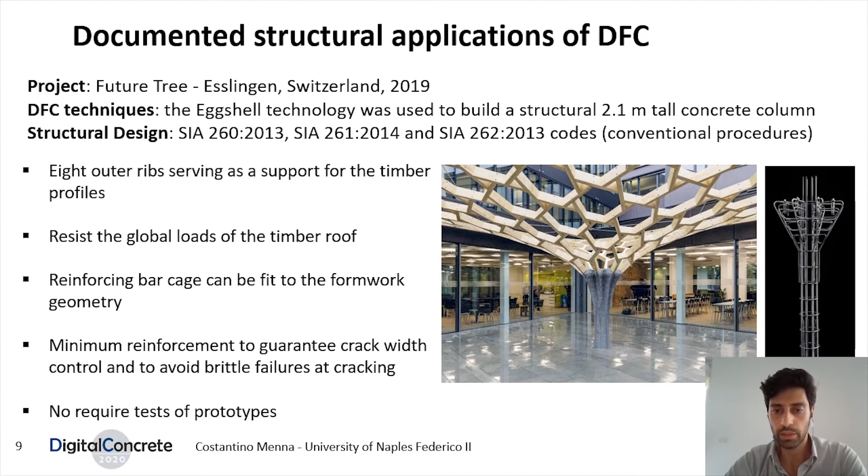Moving to bridge applications, the Bicycle Bridge Gemert in the Netherlands is one of the most representative DfC examples due to its successful implementation. The bridge is a post-tensioned structure made of 6 concrete segments fabricated by means of layered extrusion technology and then assembled on site.

The structural design was conceived to be compliant with existing structural codes. In particular, the design loads were retrieved from EN 1991, whereas the design values were checked against Annex D of EN 1990. The material properties used as input for calculations were determined by means of an experimental testing campaign at Eindhoven University. The outcome of this testing provided directionally dependent compressive and tensile strength data, as well as data on stiffness, shrinkage, and creep.

To analyze the global behavior of the bridge, a full nonlinear 3D finite element model was adopted to support structural calculations. In terms of reinforcement in the longitudinal direction, post-tensional rods were applied and fed through the openings in the segment of the structure which was printed.

Whereas in the perpendicular directions, the reinforcement consisted of an innovative concept of entrained high-strength steel cable. The global verification of the behavior of such an innovative structure was completed by means of design by testing, compliant with Annex D of EN 1990.

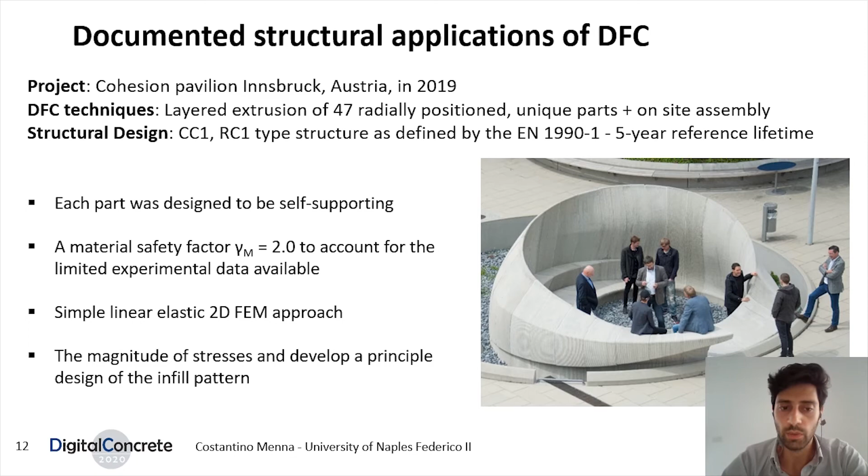The structural design was supported by a simpler linear elastic finite element model, and the outcome of this calculation was used to develop a stress-based principal design of the infill patterns. Moreover, the principal tensile stress coming from the finite element simulations was used as a checking criterion against the tensile strength of the material adopted.

In terms of reinforcement, only some reinforcement ties were applied to guarantee structural safety, but not to act in tension for the in-service condition. The reinforcement system consisted mainly of carbon fiber reinforced plates to carry the ultimate limit state in tensile loads, but for some particular elements of the geometry, conventional steel reinforcement was also adopted to guarantee structural safety.

The last DFC project shown in this presentation is the post-tensioned girder developed at Ghent University in 2019. From a structural engineering point of view, the structural principle in this case is very similar to that adopted in the Gemert Bridge in Netherlands, consisting of layered extruded concrete segments assembled on site with post-tension.

However, in this case there are two major differences. The first is that the 2D shape of this girder was optimized using topology optimization technique. Secondly, the layered extrusion technique was used to support a formwork printing process.

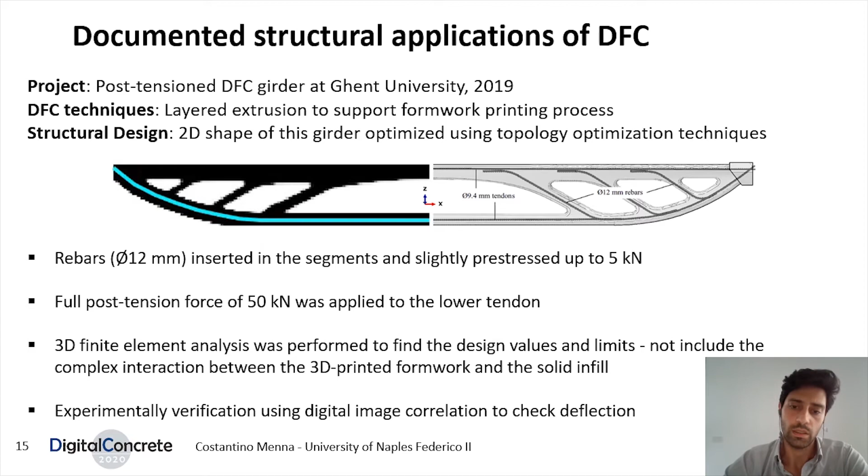From the documented examples, it appears that the issues associated with structural engineering of DFC projects are handled in a different way depending on the technique adopted and the overall design approach.

This situation was confirmed also by structural engineers operating in practice, who commonly have to face several questions, such as what is the variation in material quality, how well are the layers stacked on top of each other, what dimensional variations occur, and which are the certification and standards for materials adopted in digital fabrication.

Of course, the answer is not straightforward, but what comes out is that in this context structural engineering has to be explicitly involved in many aspects of the project, such as process control, material production, determination of structurally relevant properties, logistics, and on-site construction.

This could help a lot in terms of experience-based rules, which currently are not available for 3D concrete printing, especially with regard to the determination of possible failure modes and also with reference to quality control.

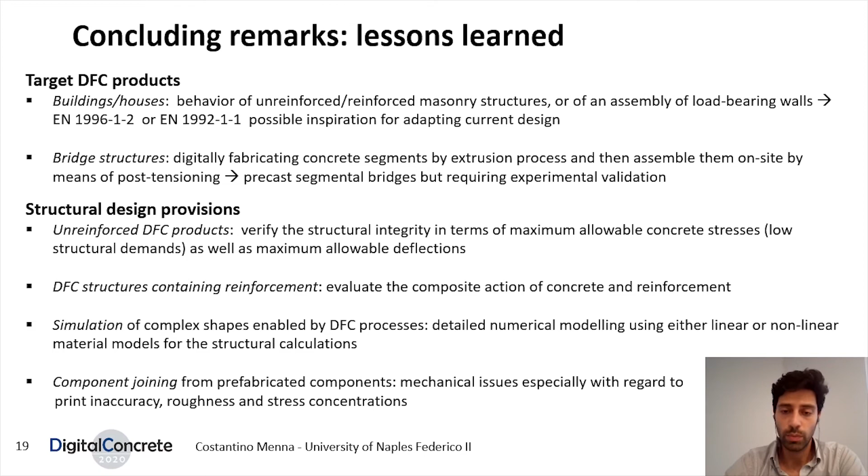It also appears that the reference lifetime for structural design input is relatively short, approximately 5 years. This is probably due to insufficient knowledge about durability behavior of innovative DFC products. Moreover, many of the calculation inputs related to material properties come from extensive experimental campaigns, sometimes from academia.

Basically, the design values are checked by means of experimental testing conducted on mock-up structures, and the results are then verified against the predicted values and against the failure modes observed during the experiments.

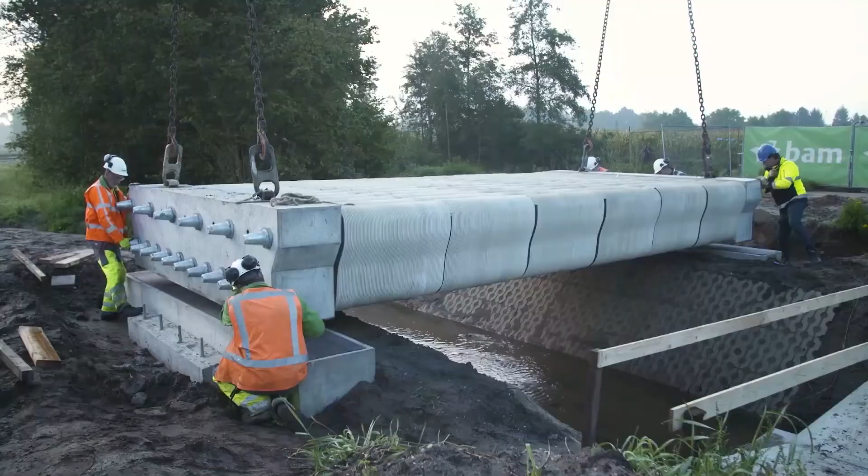It all started in Gemert with the first 3D concrete printed bridge. It opened in 2017. We actually used the facilities of the TU Eindhoven to produce it, and we worked closely together with a client and all partners that were involved.

It was a major step in bringing technology from the research center into the real world, and for us, it was the first step of printing with concrete. We did a few tests before we actually printed the bridge.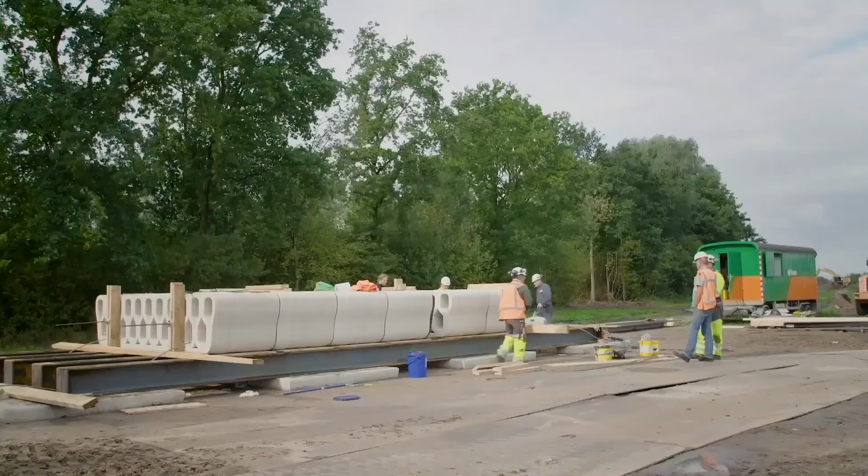If you introduce innovations, it's important that you involve all the stakeholders at every step you take. We worked closely together with the local authorities from the start of the process. They were able to check every step we took to be sure that they would get a reliable solution. Because it was completely new, we had go, no-go moments in the planning to make sure that if things could go wrong, a regular bridge could be put in place.

We used some reinforcement in the bridge in Gemert. It was put in place during the print process by putting a cable in the layers we printed, and also afterwards when the elements came on site, they were mounted together with a post-tension strand.

The design was made by Witteveen & Bos and based on principles of our BAM structural engineering and the knowledge of the researchers of Theo Salet. The complete process followed the Eurocodes, which has the possibility to meet the regular requirements, but now proved by design by testing. So during the process, we tested the model on its maximum strength at the TU, and on site we did a load test.

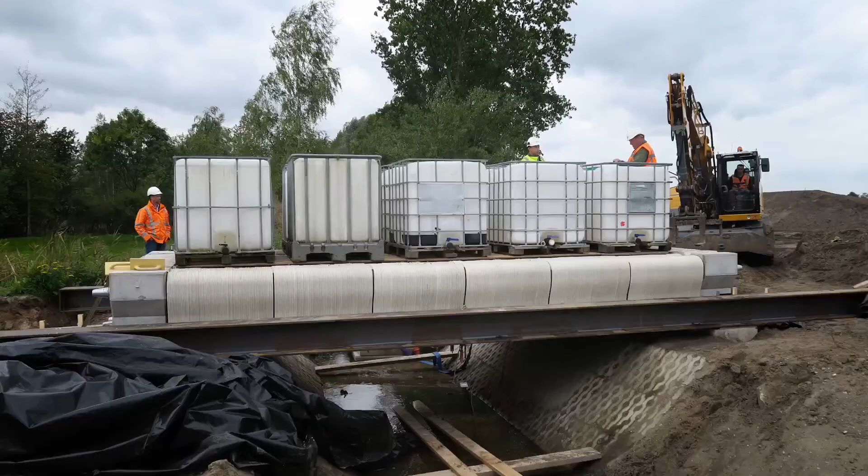We learned a lot at the Gemert Bridge, but one of the major things is that we can use less material in the same structure. It was a little bit over-dimensioned in Gemert, but we see now that we can reduce material for at least 40% as you compare it with regular concrete elements.

BAM and Weber Beamix joined forces and opened a 3D concrete printing factory in Eindhoven, which was opened last year. In this factory we are able to make bigger objects so we can scale up the ideas we have on 3D concrete printing.

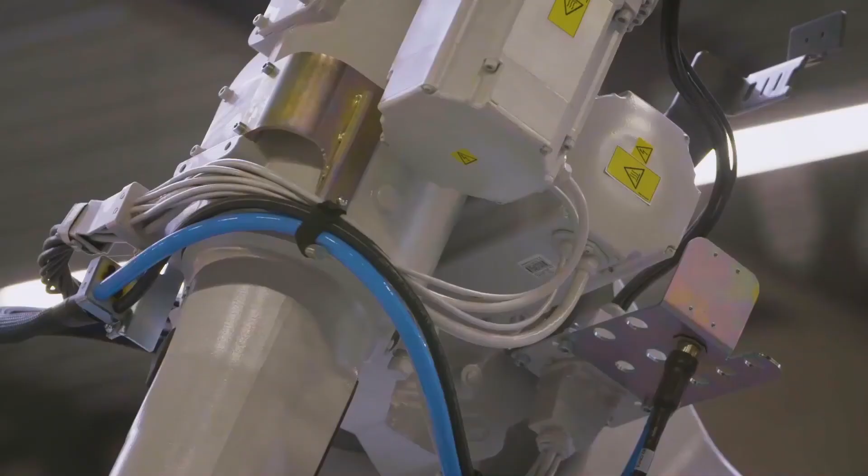So in the factory we were able to continuously learn about 3D printing and how to use it in our projects. The first things we learned in our factory is that we can use mortar with a higher strength and also use different types of reinforcement during our process.

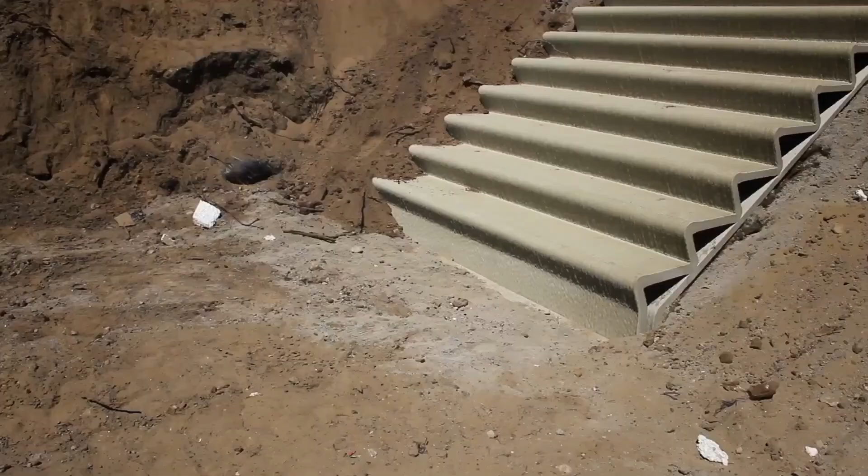At the Oude Kerklaan, we use a parametric design which was built by Witteveen & Bos, one of our partners. With the parametric design we were able to build different sizes and use the same digital design. What you see here are stairs that are an exact copy produced by a robot coming from a digital design.

So we learned a lot from the 3D printing technology, but we're not there yet. There's a lot new to come, and we're looking for opportunities to use this technology in projects. Eventually, we also want to print on-site and bigger objects, so we need to work together to make that possible in the near future. If you have good ideas on 3D printing, please contact us, we would like to collaborate with you.

Welcome back. I hope you liked the video and found some inspiration to further strengthen the collaboration between science and industry. Let's now move on to the wrap-up session.